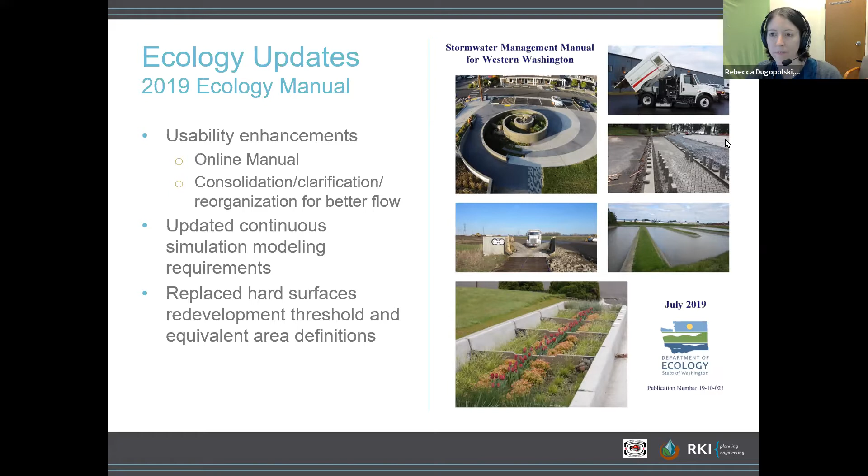Some additional updates included updates to minimum requirements number 2, 5, and 7. Those include the construction requirements, the flow control requirements, and the on-site stormwater management requirements.

Minimum requirement 2 was updated to incorporate changes made to the construction stormwater general permit. Minimum requirement 5 was updated to require soil quality and depth BMP when choosing to use the LID performance standard. And minimum requirement 7, the flow control requirement, was updated to ensure that threshold discharge areas discharging to a marine water body meet all exemption requirements before it could be determined to be flow control exempt.

There were also updates to the concrete washout BMPs, both for concrete handling and concrete washout areas, with some clarifications there, and incorporation of additional source control BMPs. There are 17 total new source control BMPs, 4 of which were previously included in one BMP focused on landscaping and lawn vegetation management, but the rest are new BMPs that are also referenced in the Kitsap County manual.

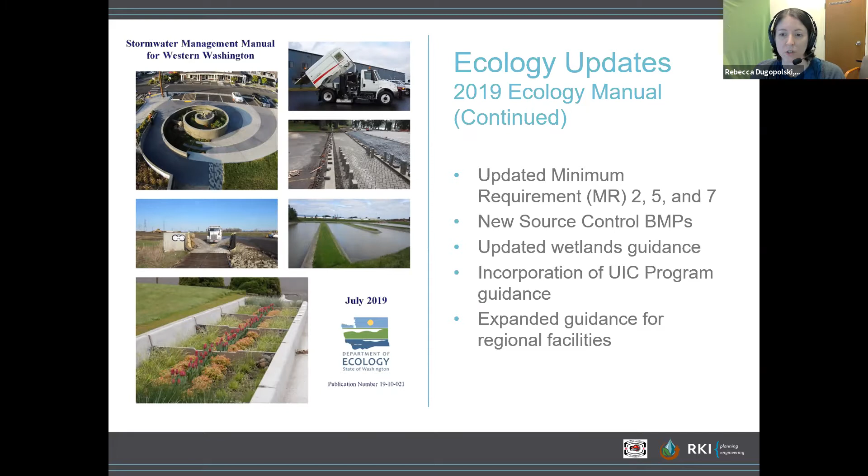And then some updated wetland guidance focused on just a change to how the requirements are applied. So there's some new information on how wetland guidance is applied, and expanded guidance for regional facilities, as well as incorporation of underground injection control program guidance. So those were some of the key updates to the ecology manual.

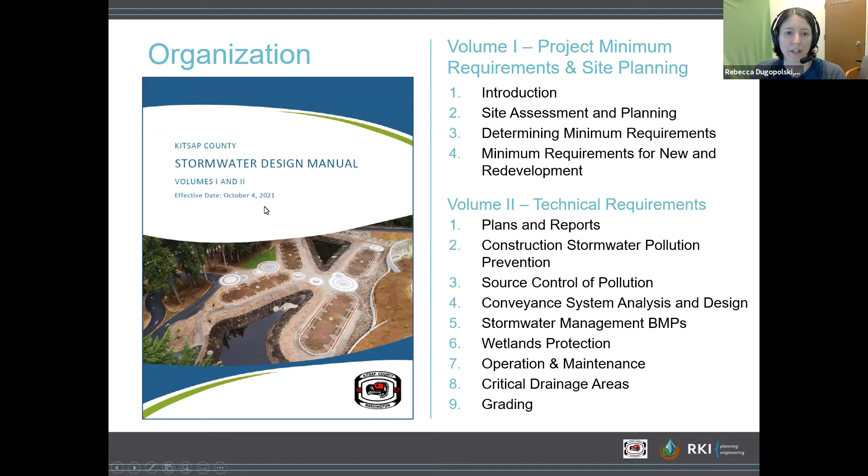Shifting next into the Kitsap County Stormwater Design Manual, you'll notice it's the same structure as the previous Kitsap County manual, so we still have 2 volumes. Volume 1 contains 4 chapters and Volume 2 contains 9 chapters. That structure is the same as the previous manual, so you'll notice the same format. And Angie mentioned already that the effective date is coming up on Monday, October 4th.

So that includes the Stormwater Management Manual for Western Washington that we've been talking about, or the Ecology Manual, the Western Washington Low Impact Development O&M document, LID Technical Guidance for Puget Sound, and both the WSDOT Highway Runoff Manual and Hydraulics Manual, and then the Rain Garden Handbook for Western Washington. So those are some other useful design manuals that should be used in conjunction with the Kitsap County Manual.

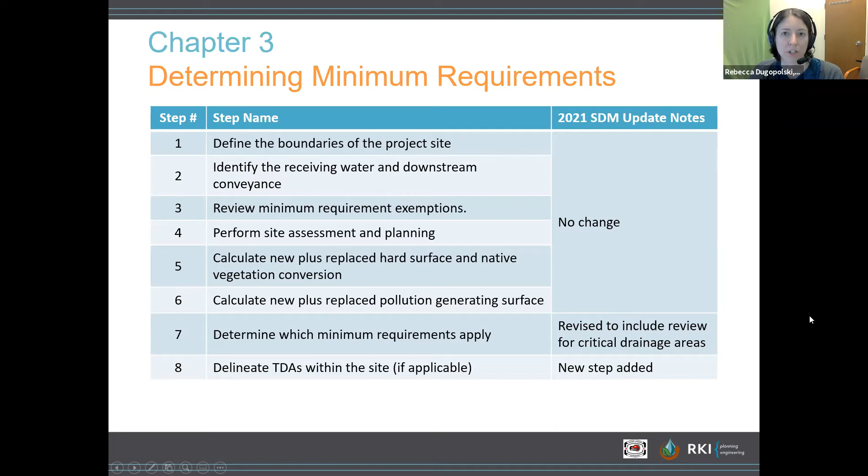In chapter 3 of Volume 1, there used to be a 7-step approach to determining minimum requirements, and as I mentioned this step 8 is new. There were some minor changes to step 7 as well, but process steps 1 through 6 are the same. So now step 7 has been revised to include review for critical drainage areas, and then step 8 has been added since we're adding some information about threshold discharge areas, which we'll be talking about pretty extensively today.

The new step 8 includes delineating threshold discharge areas within the site, if applicable. This won't be applicable to all sites. You can use threshold discharge areas if you'd like in rural areas outside the urban area and urban growth area, on residential sites that are 5 acres or greater. For each minimum requirement applicable to the project, take a look at the TDA thresholds to determine which BMPs must be constructed. There's specific information on those in minimum requirements 6, 7, and 8.

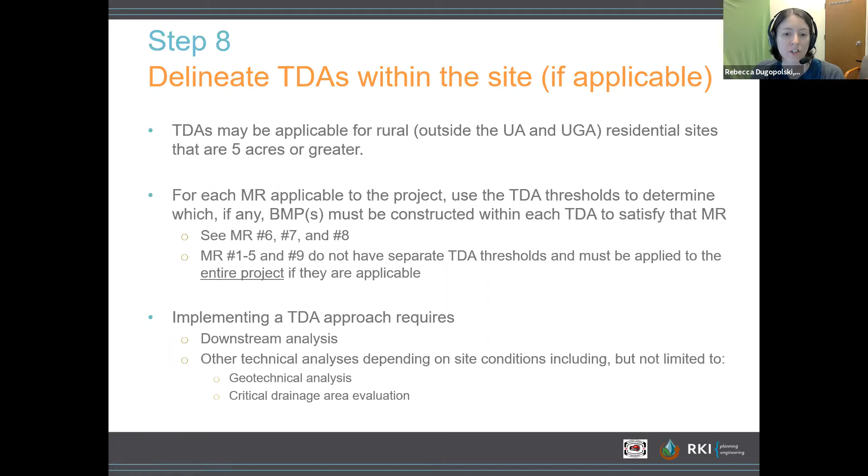Minimum requirements 1 through 5 and 9 do not have separate threshold discharge area thresholds and must be applied to the entire project. Implementing a threshold discharge area approach requires downstream analysis and could require other technical analysis depending on site conditions, including geotechnical analysis or critical drainage area evaluation.

So you may be asking, what is a threshold discharge area? Some of you are probably familiar with this from the Ecology manual, but the definition here is the area within a project site draining to a single natural discharge location, or multiple natural discharge locations that combine within a quarter mile downstream. Here's just a graphic showing TDAs. As mentioned, they may be applicable for rural areas outside the UA and UGA, on residential sites that are 5 acres or greater, and this can be found in the glossary of the manual.

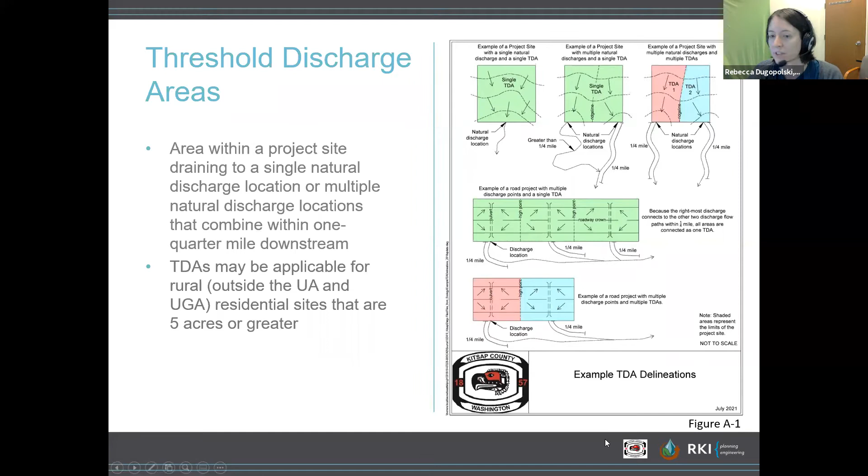You can find that here under Appendix A, letter T, and here you go, threshold discharge area. Another thing to note here is it's an area within a project site draining to a single natural discharge location, or multiple natural discharge locations that combine within a quarter mile downstream, as determined by the shortest flow path. We'll be looking at that as part of one of the breakout exercises today.

So next, shifting into some of the flow charts, looking first at figure I-4.1. This is a flow chart for determining minimum requirements for new development projects. Only minor changes were made to this flow chart.

Terminology has been updated from project to site, for consistency with ecology. We also added clarification in the second footnote that this box applies to census-defined urban areas and urban growth areas only, and does not apply to rural projects.

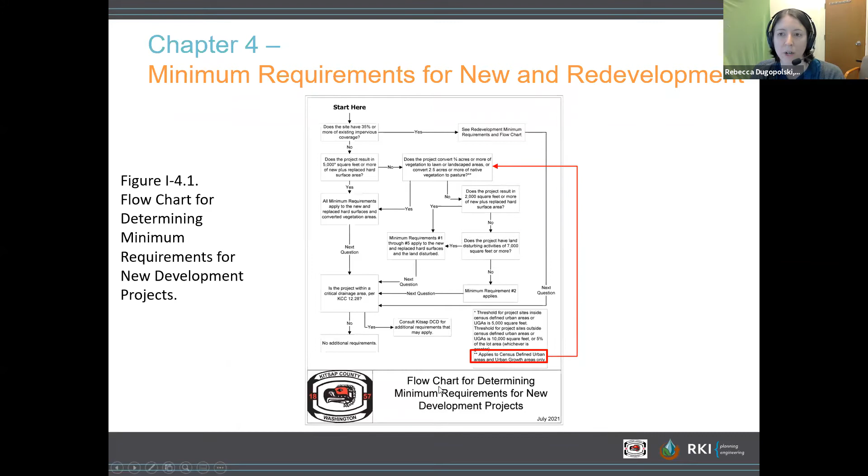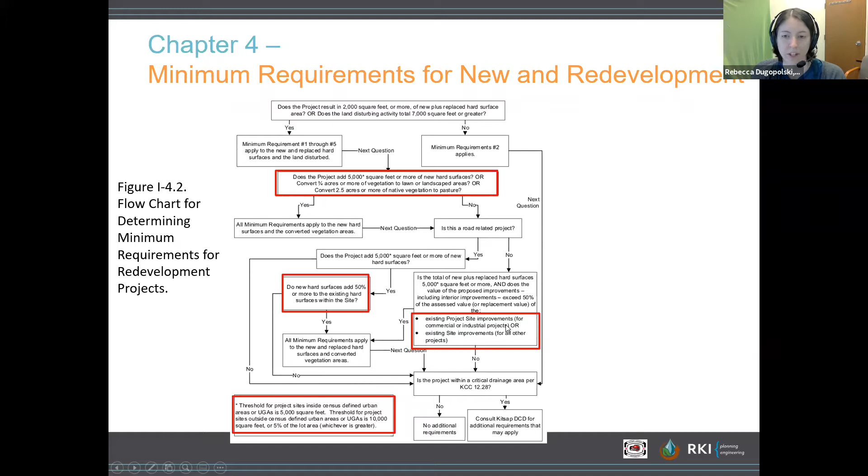This is for consistency with the 2019 Ecology Manual. The recommended guidance that popped up here is not included in the manual, but looking at what those values might be, you could check the Kitsap County Assessor database to determine the base value, and use the building code value for improvements.

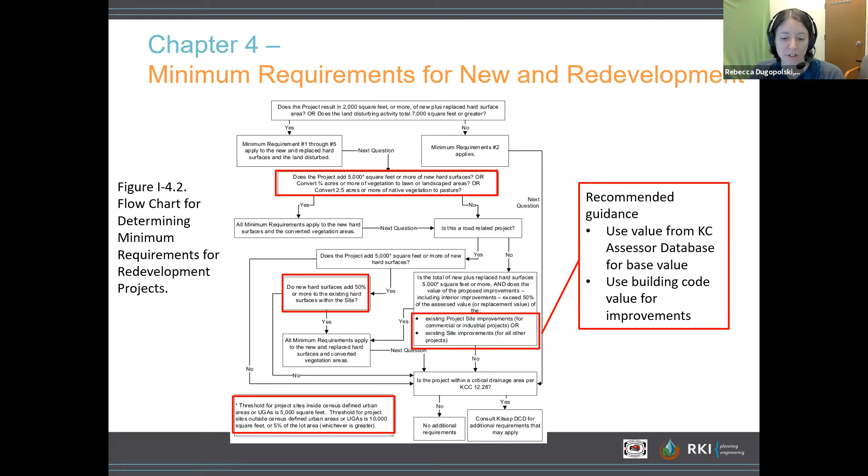For the minimum requirements themselves, these were updated for consistency with ecology. Minimum requirement 2 was updated for consistency with the updated construction stormwater general permit. There were also revisions to several of the 13 elements, listed here - pretty minor changes throughout, for consistency with ecology. We'll be focusing on 5, 6, and 7 a little more today.

So we're looking at updates to some of the tables, adding language for threshold discharge areas, and we'll go over these in more detail. Also wanted to highlight minimum requirement 8 related to wetlands - added language for threshold discharge areas, and updated references to the Ecology Manual and the Kitsap County Critical Areas Ordinance.

This first table is table 1-4.2. It summarizes the on-site stormwater management requirements, minimum requirement 5, for large projects. This table didn't have any significant changes since the 2016 Kitsap Manual.

Just a couple things to clarify: full dispersion used to be listed as a requirement for new development or redevelopment outside the UGA and urban area - we added references to rural areas, for consistency with table 4.3 revisions in terms of the terminology used for the lists, which we'll look at in a minute.

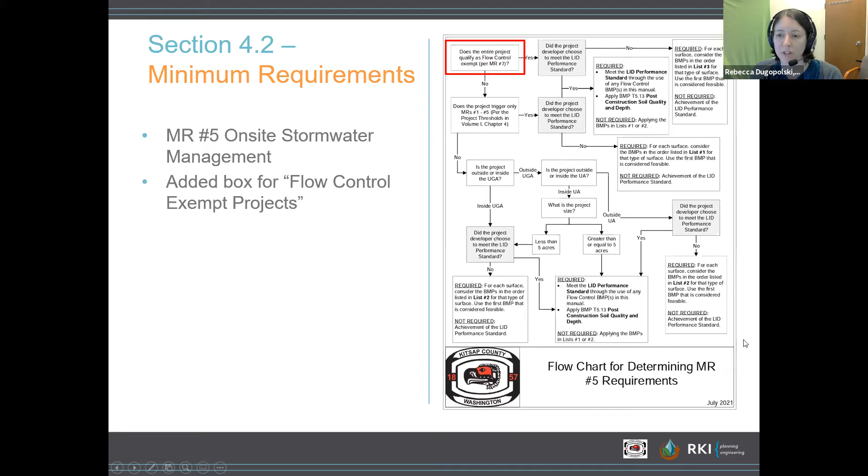This slide summarizes the approach for flow control exempt projects. As mentioned, it's the same as the 2016 Stormwater Design Manual, but was shifted forward in the 2021 Stormwater Design Manual for clarity. There's also new content added related to threshold discharge areas and how those apply to these types of projects.

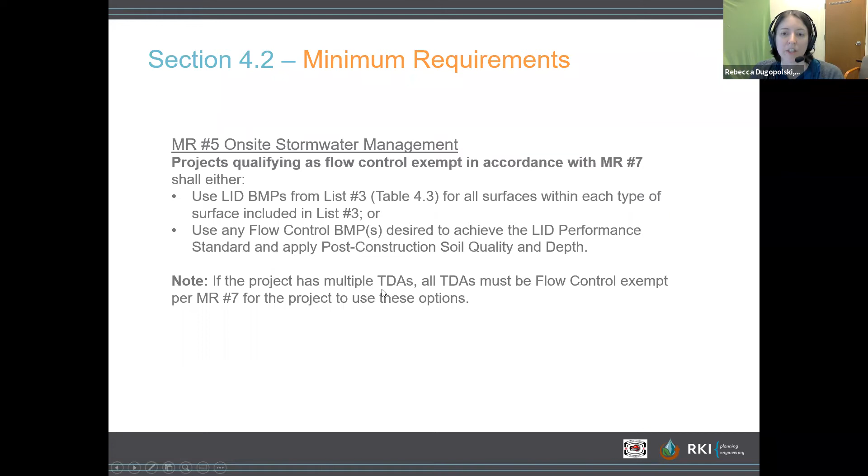If your project has multiple threshold discharge areas, then all threshold discharge areas must be flow control exempt per minimum requirement 7 for the project to use these options. So something to think about there - everything has to be flow control exempt if you want to move forward with that approach.

Minimum requirement 6 is runoff treatment, as I mentioned. Language got added for threshold discharge areas, taking a look at what the thresholds are and how those are applied.

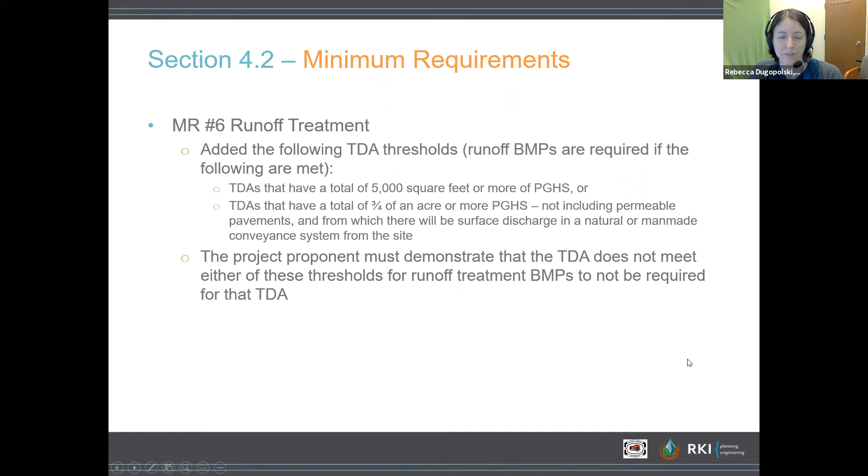And then also minimum requirement 7. We clarified the text under the exemptions, updated to require a 15-minute time step for evaluating the increase in the 100-year flow, for consistency with the Ecology Manual, and then adding the following threshold discharge area thresholds. So flow control BMPs are required if the following bullets are met here. Taking a look at what those thresholds are and where those apply.

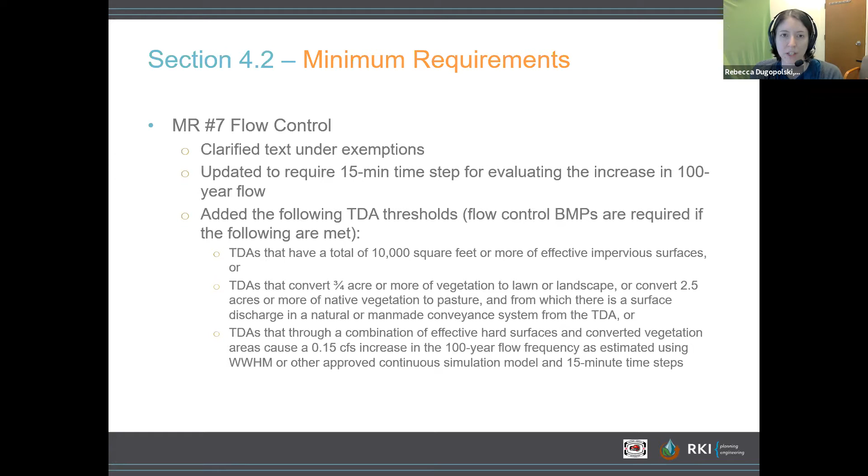All right, so that wraps up my key changes to volume 1. I don't see any questions in the chat, but feel free to pop those in there. We can get to those during the Q&A if you have any questions on the volume 1 key changes.

And with that, Robin, are you ready to start sharing? I am ready. All right, you took over already. In fact, are you seeing my screen right now?

We are. It looks like you're on Appendix H. Let me get set up in slideshow format and I'll be right there. And lastly, can you confirm you're seeing the slides but not my notes? Seeing both right now. Okay. And it looks like you're also on Appendix H slide. Yeah, I don't know why that happened.

And there we are. All right, everybody, so we are going to go ahead and do our first breakout exercise.

So this exercise relates to threshold discharge areas. We want you to determine TDA delineation for 2 hypothetical projects. You're going to have 10 minutes to complete this exercise. We're going to break everybody up into groups of about 5 to 6 or so. If each group would please nominate one person from your group to lead the report out of results when we get back.

When we do come back together and ask you to report out your results, we'll ask you to put those in the chat, and Rebecca will monitor the chat and we'll discuss everybody's results and see how they compare with ours. So before we do the breakout, let me give you a little bit of orientation.

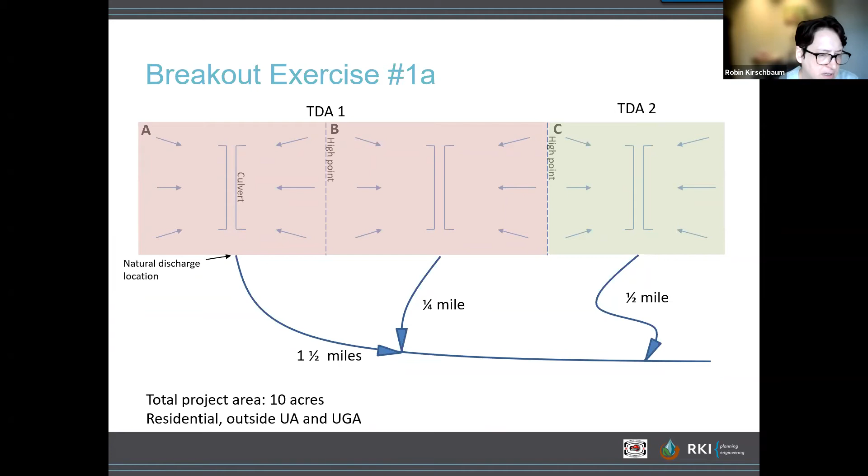Okay, all right, we'll go ahead and compare your answers with ours. So for exercise number 1A, those who said 2 threshold discharge areas were correct. Subbasins A and B make up TDA 1, and subbasin C makes up TDA 2. Nice job there.

And for exercise number 1B, those who said TDAs are not applicable were accurate. There are no TDAs for this site because the project area is less than 5 acres. As a reminder, TDAs are applicable for Kitsap County for rural residential projects that are 5 acres or greater. So nice job on that exercise, everyone.

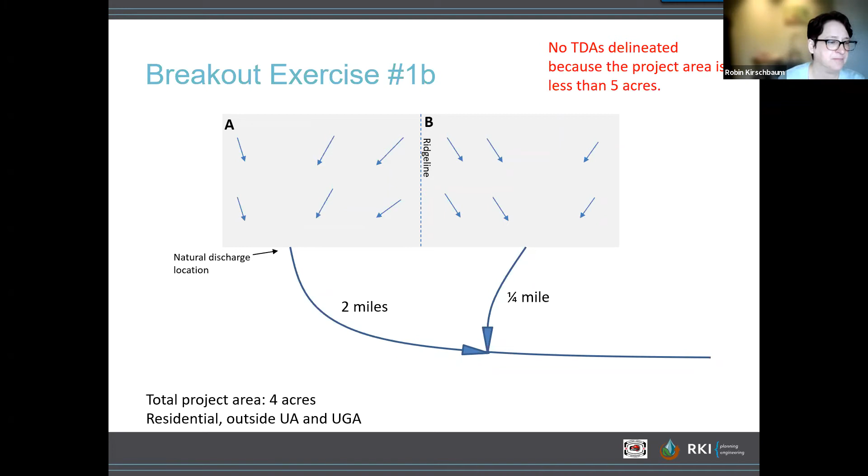Anybody have any questions for us in the chat on that? Not seeing any questions. Perfect.

All right, well, Rebecca gave us an awesome overview of the key changes in the manual to volume 1. Volume 1 is where we lay out the minimum requirements, applicability, and what is required for those minimum requirements that may apply to your site. Volume 2 is more of where the rubber meets the road in terms of what your submittal requirements are, how to select best management practices if required, and how to design those best management practices. So I'm going to go over volume 2, the key changes in the updated manual.

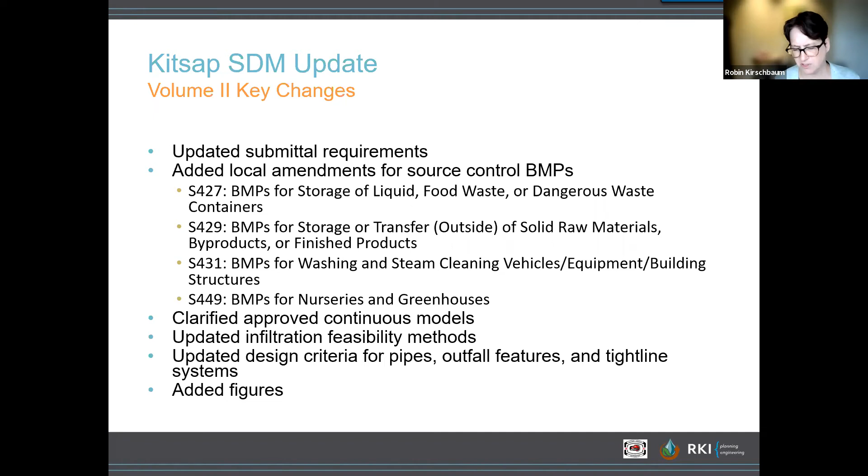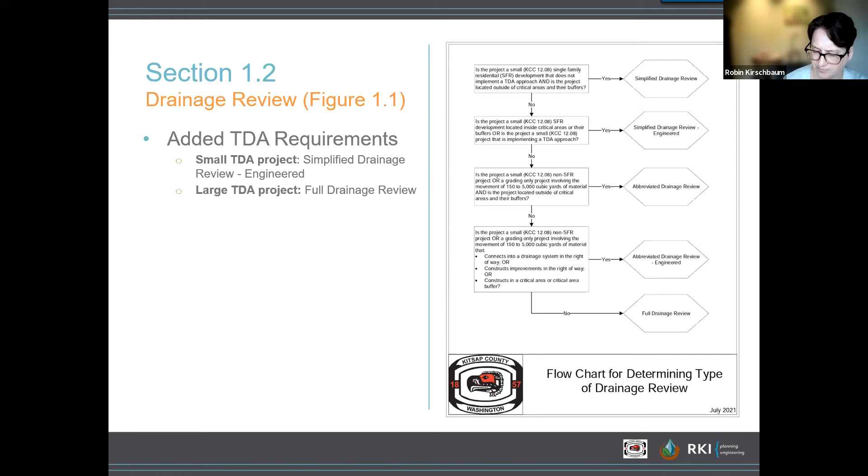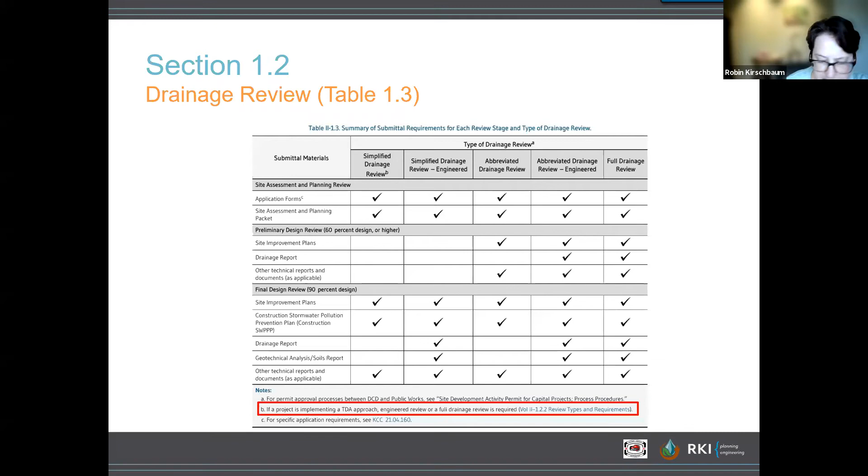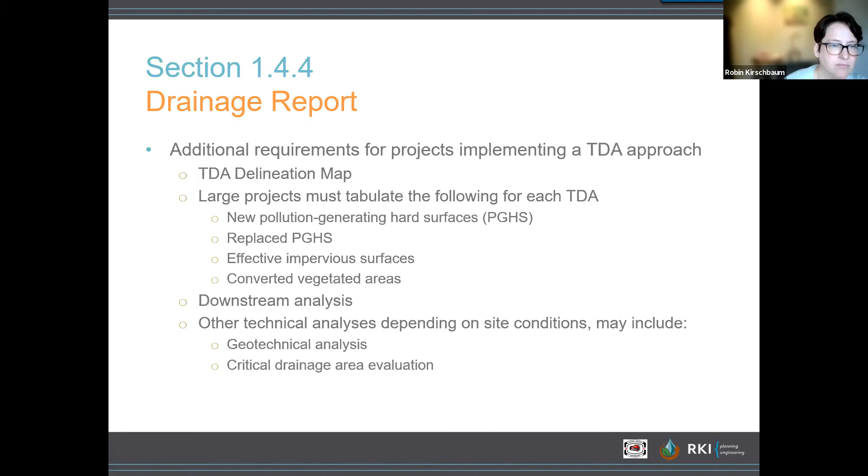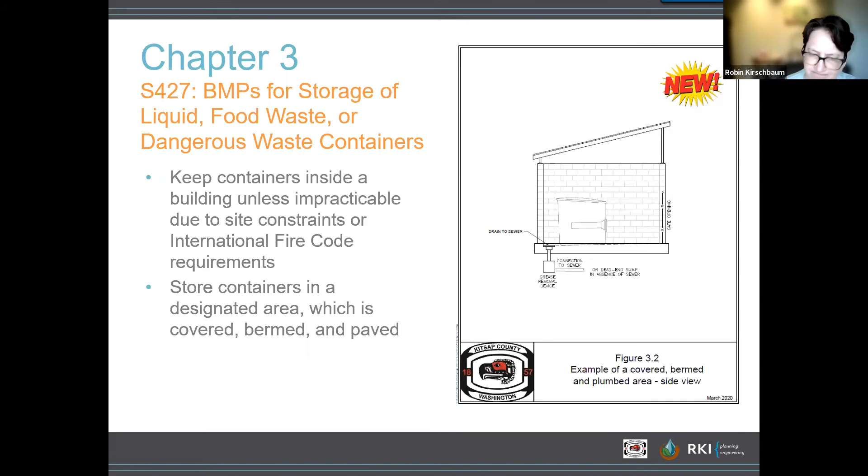Section 4.7, downstream analysis requirements. Downstream analysis was always required for projects with SDAP applications that meet any of the criteria listed in code section 12.10.060, always required for large projects and for project sites located in critical drainage areas. The change is that they're also now required for projects that are implementing TDAs.

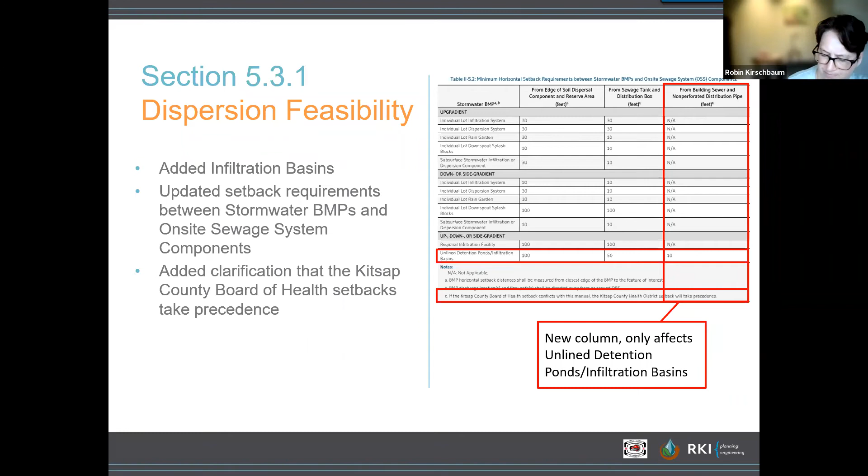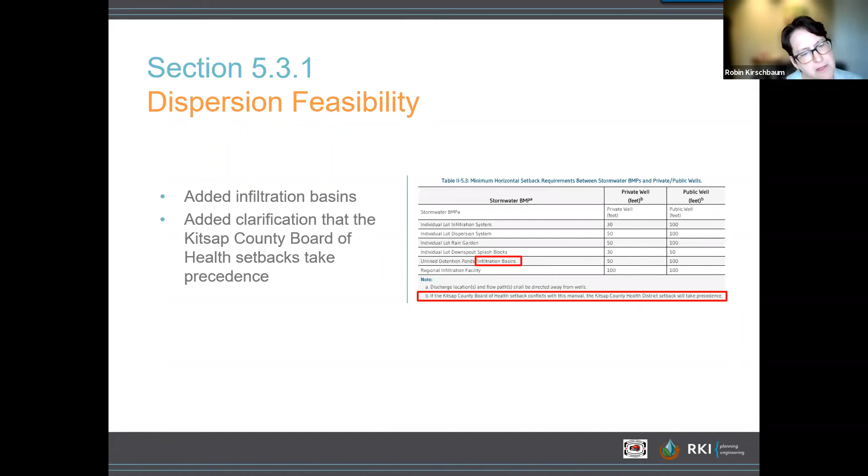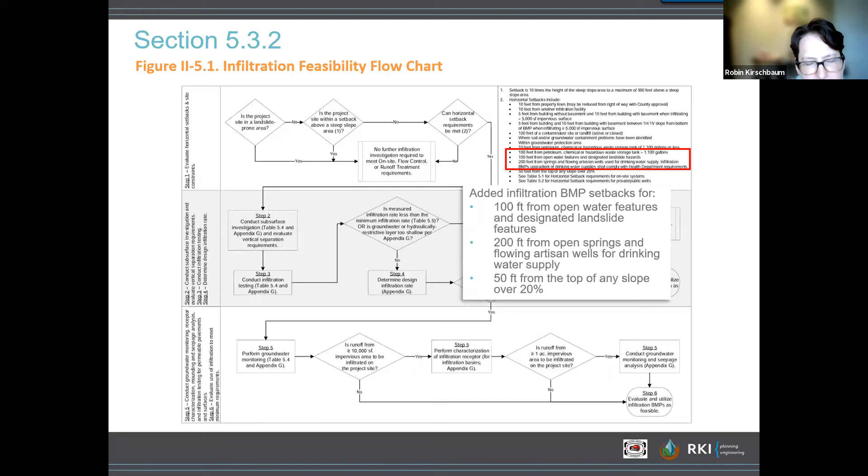In section 5.3.2, we have figure 5.1, a flow chart that guides you through the process of determining what you're required to do for infiltration feasibility assessment. There was a small change to the flow chart, to the notes in the upper right, where we added infiltration BMP setbacks, specifically 100 feet from open water features and designated landslide features, 200 feet from open springs and flowing artesian wells for drinking water supply, and 50 feet from the top of any slope over 20%.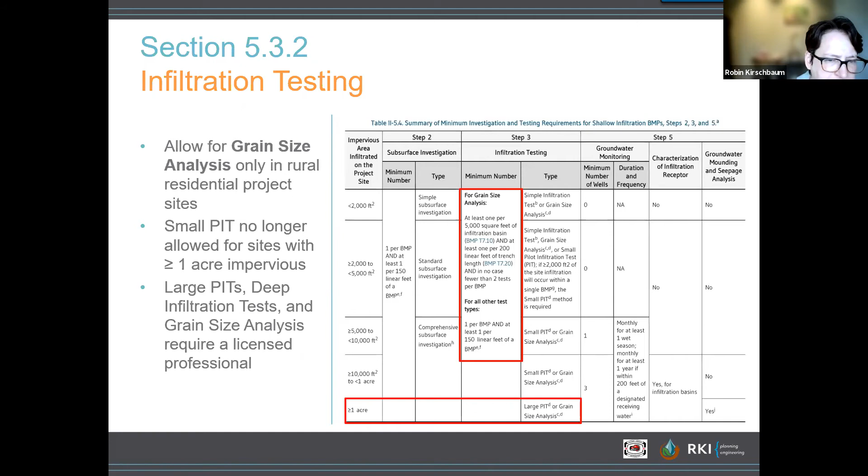As I mentioned earlier, there were some updates to the infiltration testing methods allowed in this manual update. Specifically, we're now allowing for grain size analysis, which was not previously allowed. It's now being allowed only in rural residential project sites. A small pilot infiltration test or small pit is no longer allowed for sites with greater than or equal to 1 acre of impervious area being infiltrated. For large pits, deep infiltration tests, and grain size analysis, we've clarified that a licensed professional is required. We are going to have a breakout exercise on this infiltration testing in just a moment, so heads up there.

Table 5.5, minimum measured infiltration rates. We're still in section 5.3.2 here, where we talk about infiltration testing. The update to this table is that for bioretention without underdrain, the minimum allowed measured infiltration rate for meeting flow control, runoff treatment, and LID performance standard used to be 0.6 inch per hour. We updated that to 0.3 inches per hour for consistency with all the other BMPs and with the Ecology manual.

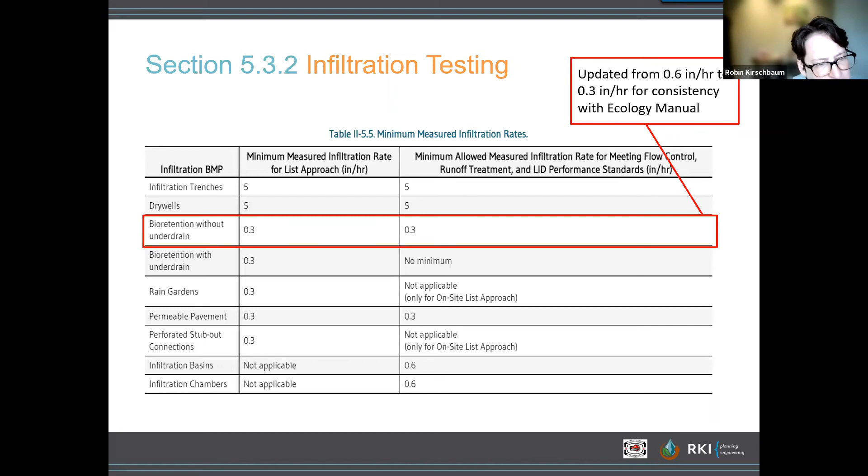All right, now we're going to switch gears and talk about updates to the runoff treatment BMP selection. So figure 5.2, runoff treatment BMP selection flowchart.

We made updates here just for consistency with the Ecology manual. Specifically, we removed media filter drain from the phosphorus control BMP menu. We clarified the process for considering whether enhanced treatment BMP is required after selecting a phosphorus control BMP. And we added permeable pavement to the listed BMPs for infiltration after pre-treatment.

So that's a significant change, that permeable pavement is now allowed for runoff treatment BMP. You'll find when you read further in the manual that you'd be required to use a sand layer underneath the permeable pavement if you don't meet your site suitability criteria. You can read further about that in the permeable pavement section of Chapter 5.

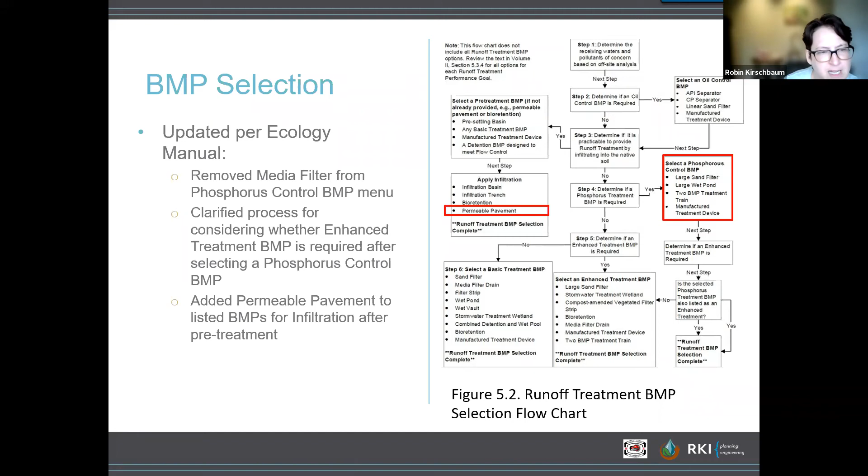Chapter 8 is critical drainage areas, and there was an update to the critical drainage area maps. Gamblewood, Edgewater, Miller Bay Estates, and a portion of Manchester were removed from the maps. For Manchester, the removal was associated with the Stormwater Park and the associated upgrades there, which helped alleviate critical drainage areas in that area.

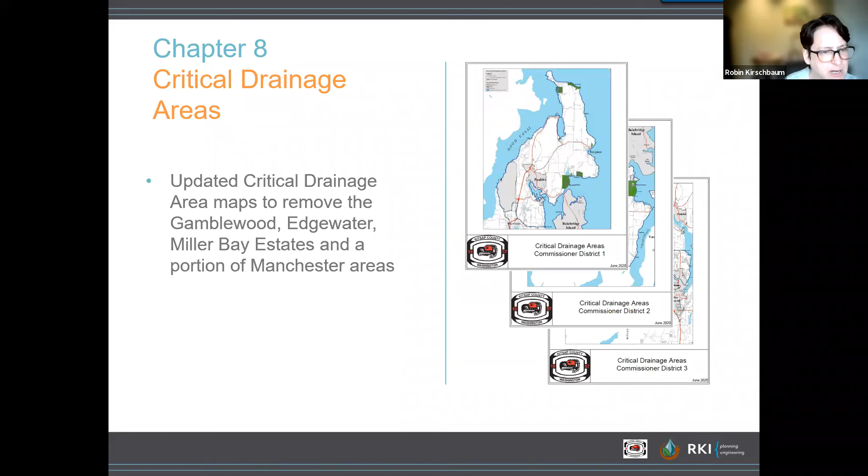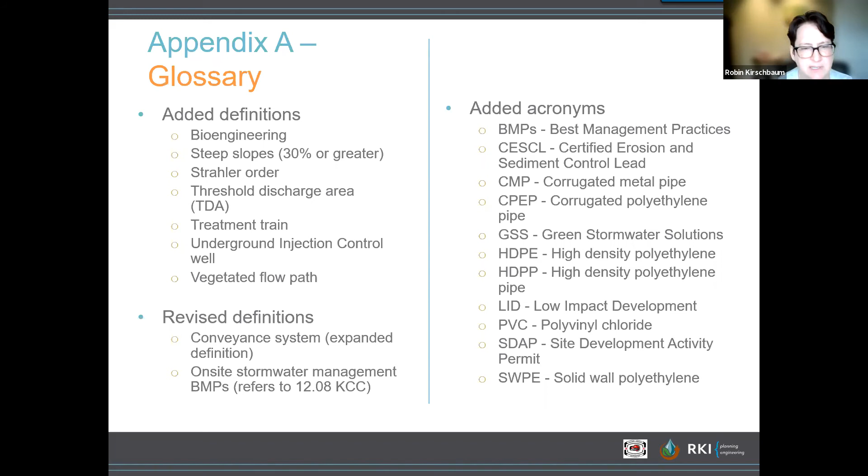Lastly, I want to run through some updates that were made to some of the appendices. So Appendix A is the glossary, and you can see we added several definitions to the glossary. Some definitions that were in there before were revised, and we also added numerous acronyms just for clarification and completeness.

Appendix C is the site assessment and planning packet. We made updates just to incorporate threshold discharge area into that packet. Specifically, you'll see updates in portion D of the packet where you're expected to document existing and proposed site land cover areas, and section E of the packet where you're expected to lay out your potential low impact development BMPs. You'll notice there are some changes associated with how to do your documentation if you're using TDAs.

Appendix F is hydrologic hydraulic modeling methods. There we added some tables and figures that were previously in the 2010 Stormwater Design Manual. They were not incorporated in the 2016 update, and they've been reincorporated now in this new 2021 update. We added a new figure, which used to be in Chapter 4, that now got moved to this Appendix F, and updated some equation formatting.

Appendix G is subsurface investigation and infiltration testing for infiltration BMPs. There's some fairly significant updates there because of the changes in the infiltration methods that we just ran through. So there's updated terminology and references. We added underground injection control, or UIC, well language for consistency with the Ecology manual. We updated procedural guidelines to try to clarify them and make them easier to use. And again, we added grain size analysis for consistency with the Ecology manual.

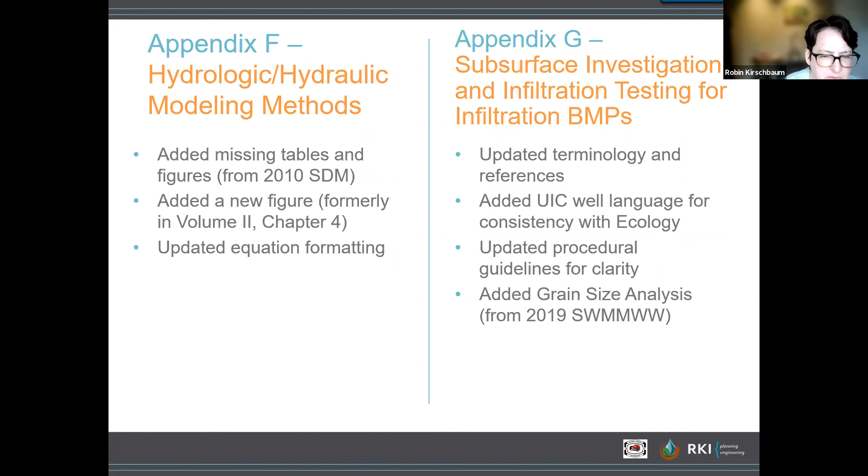Appendix H is LID infeasibility criteria. The infeasibility criteria were updated for consistency with the Ecology manual. Primarily, this relates to dispersion BMPs. We added new infeasibility criteria for perforated stub out pipe connections. And we removed infeasibility criteria for permeable pavement because they were very extensive and duplicative of the Ecology manual, so now we are just referencing the Ecology manual.

All right, this brings us to our second and last breakout exercise for the day. In this exercise, the objective is to identify which infiltration testing methods you would be allowed to use for 4 hypothetical project sites. Again, we're going to take about 10 minutes to complete this, and we're going to do this in breakout groups again.

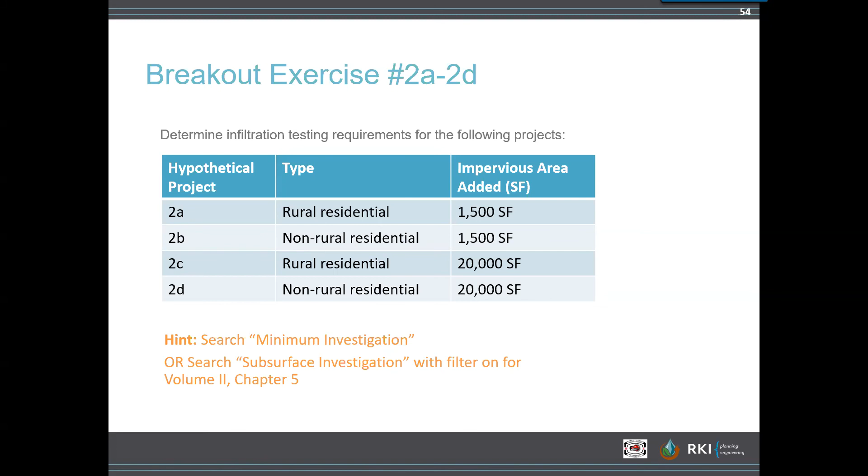We're ready for 2D. Let's go ahead and add your responses for 2D, which is non-rural residential, 20,000 square feet impervious area added. All right, 2D, I see one for comprehensive, one for small pit, one for small pilot. All right, that looks like it. Yep, love the diversity.

Well, hopefully you found your answer in table 2-5.4, which we'll look at in just a minute. The answers we came up with: for 2A, simple infiltration test or grain size analysis. For 2B, simple infiltration test only. For 2C, small pilot infiltration test or grain size analysis. And for 2D, a small pit only. Let's take a look at why that's the case.

All right, so we're looking at the column step 3 for infiltration testing methods. If the impervious area infiltrated on the project site is less than 2,000 square feet, and there's also notes we're going to need to look at on the next slide, you'll see that under step 3 infiltration testing, you're allowed to use simple infiltration test as long as note B applies, or the grain size analysis as long as notes C and D apply. We'll read those notes in a moment.

The other relevant information here is for project sites with between 10,000 square feet and an acre of impervious area infiltrated on the project site, you would be allowed to use the small pit if note D applies, or grain size analysis if notes C and D apply.

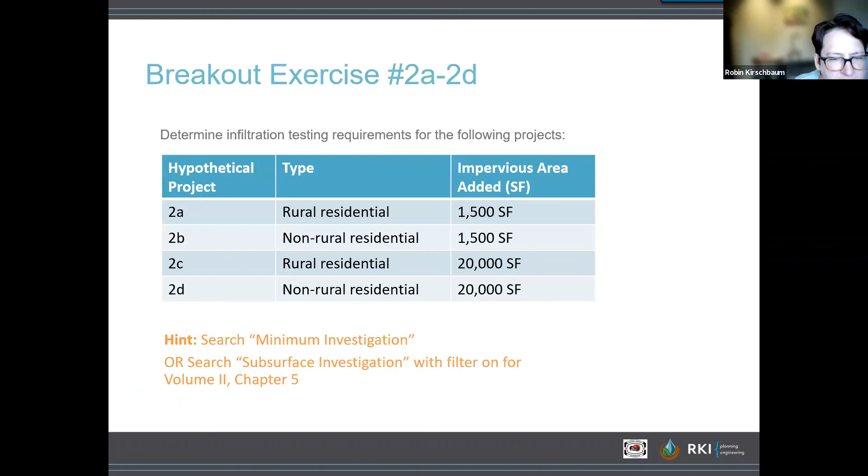The simple infiltration test is not allowed for project sites with no offsite point of discharge, is only allowed for project sites located in rural areas. You know what I'm saying? I do see what you're saying. 2B is non-rural.

Do we need to issue a correction on that, Rebecca? That may be an error. I'm reading the note because right now it says the simple infiltration test is only allowed for project sites located in rural areas, but I believe that should say the grain size analysis is only allowed. Is that correct, Robin? Or wait, the next note is grain size analysis is allowed for rural. Okay, yeah, that is confusing. We'll take a look at that and issue some clarification if we need to. Thanks for pointing that out. It's an important question.

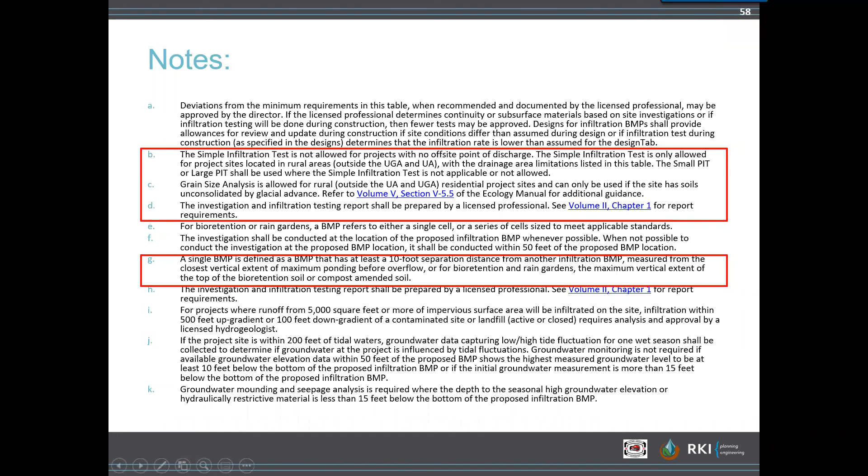Robin, there's one other question that came up in the chat. If you flip back one slide. So not related to this exercise, but there was a question about will well monitoring really be required for each infiltration facility for single family residential on an individual lot, as stated in table 2-5.4. I believe that's related to step 5, groundwater monitoring, which we didn't highlight in this exercise, but the question's asking if well monitoring is required for single family residential. So step 5, groundwater monitoring.

There's the minimum number of wells there. If you've got 5 to 10,000 square feet of impervious area infiltrated on the project site, you would need 1 well. And if you've got more than 10,000 square feet, you would need a minimum of 3 wells. Does that answer the question? I believe so. I didn't see any footnotes related to whether that would be required for single family residential or not, but I think that's the question, depending on the project size, is that really going to be required for those projects?

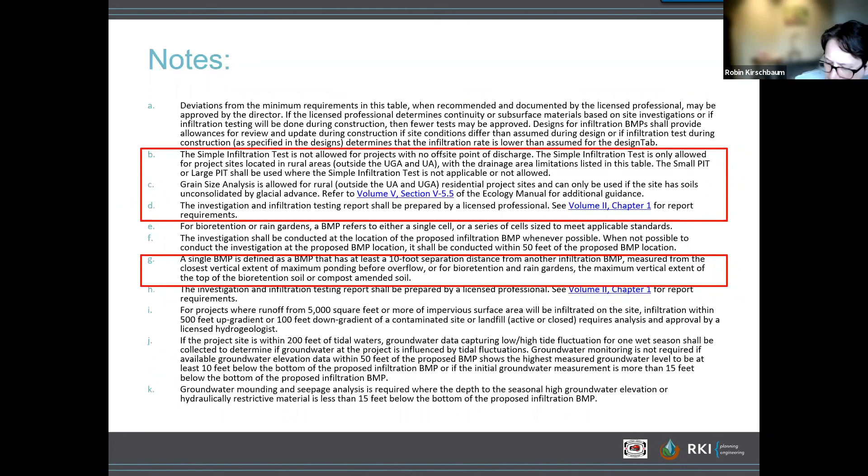So let's take a look at note I. For projects where runoff from 5,000 square feet or more of impervious surface area will be infiltrated on the site, infiltration within 500 feet up gradient or 100 feet down gradient of a contaminated site or landfill requires analysis and approval by a licensed hydrogeologist. So looking at the information summarized in this table, there'd be no exception for a single family residential. Does that answer the question? And do we have any other questions before we move on?

There is a question earlier in the chat that asks, what platform did you use to create this online manual? We used a software called Flare. Madcap is the provider, Madcap Flare, and it's the same software that Ecology used for the 2019 Ecology manual update.

We will, so you'll be able to use the manual online. You'll also be able to print a PDF from the online version. And you'll see that from the online version, you can also download figures and CAD files. You can also use a traditional PDF if you preferred.

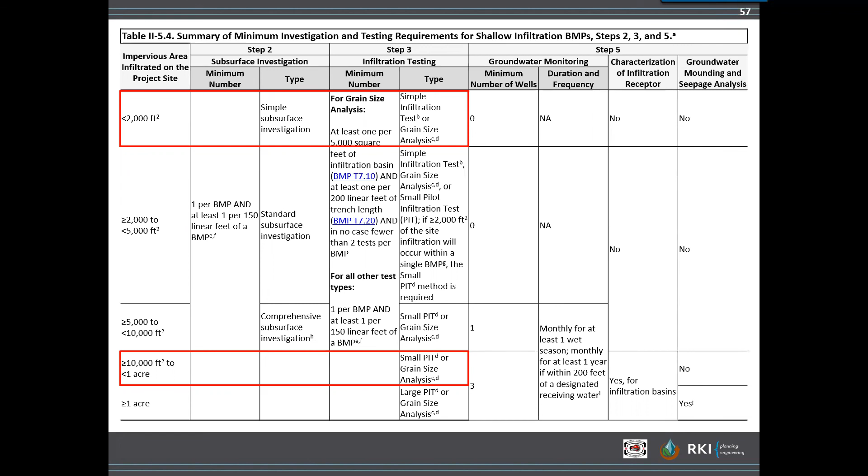All right, well, that actually concludes our summary of the key changes in the manual and our 2 breakout exercises. So we wanted to leave a little bit of time for discussion or any other questions that folks may have. Anybody want to raise your hand or throw anything in the chat in this moment?